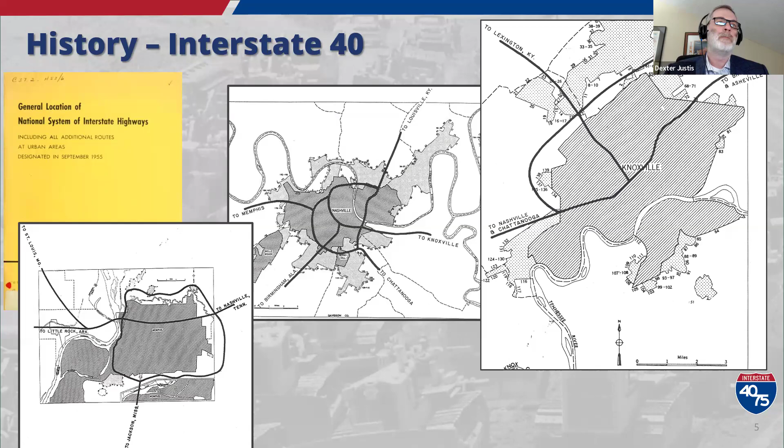These are the drawings from the Yellow Book back in the 1950s that show what ended up being I-40 coming out of Little Rock, Arkansas into Memphis, on over to Nashville, and then on over to Knoxville, going right through Knoxville. Obviously in the Yellow Book, at that time they didn't have interstate numbers, but that is the same interstate. And then you compare that Yellow Book image to what Knoxville looks like today, and you can kind of see that small bypass that goes around Knoxville called I-640 that pretty much looks very similar to what the Yellow Book said it should look like. Now it took many years to implement what that interstate structure looks like, but that was the genesis of the beginning to where we are today.

So this is a little more zoomed out view. I showed you Knoxville just a second ago, and you see that bypass, I-640. But the limits of our project are really to the far west of the screen, to the left. You can see I-40 and I-75 merge at what we call a directional interchange. And then it runs 17 miles to I-640. Are y'all seeing my pointer?

I see it. Okay, yeah, I didn't know. Yeah, so it might be just mine. I'm gonna come out and come back in. I don't know why it's not showing, but that's fine.

The I-640, I-40 intersection on the west side of Knoxville. It's 17 miles from the directional interchange in Loudon County, to the west on the left of the screen, to right here in the middle of the screen. So it's 17 miles.

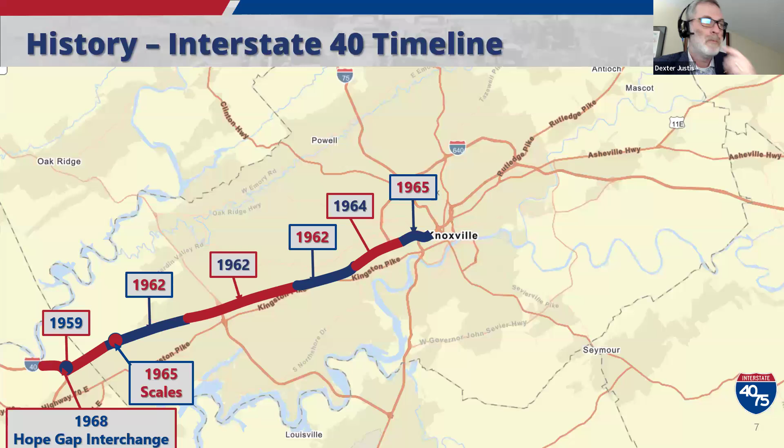As time moved on, we started doing interchanges and some improvements and widening from the middle 60s to the early 80s. We widened from what was a 2-lane on each side of the interstate to a 3-lane through the majority of this, and sometimes 4-lane in parts as well.

You also see where we updated a couple of those areas. In 1981, I-40 and I-640, that bypass I talked about, came into existence, which was the year before the Knoxville World's Fair. That was largely intended to be in place right before the World's Fair came to Knoxville in 1982.

Pellissippi Parkway, which is another interstate that runs north to south through the middle of the screen, came on board in the late 90s. So we had an interchange with another interstate come into the middle of the corridor.

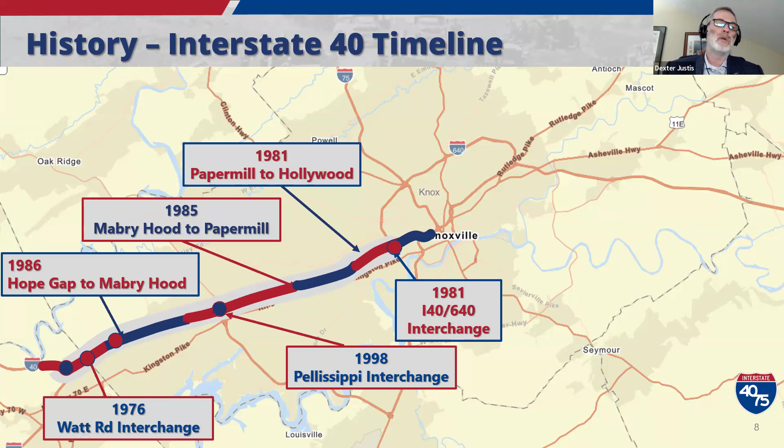As I scroll on through, we started having more interchange modernization happening in the late 90s and into the 2000s. As this corridor grew and expanded, the interchanges that were here became overutilized, and we realized we needed to do projects to make the interchanges work a little better, so we'd have lower friction values and better movement of traffic through the corridor.

You can see multiple interchanges: Gallaher View in 1996, Cedar Bluff in 1993, 2003 for Lovell Road, and Paper Mill in 2003. The latest one we did a little expansion on was Campbell Station in 2015.

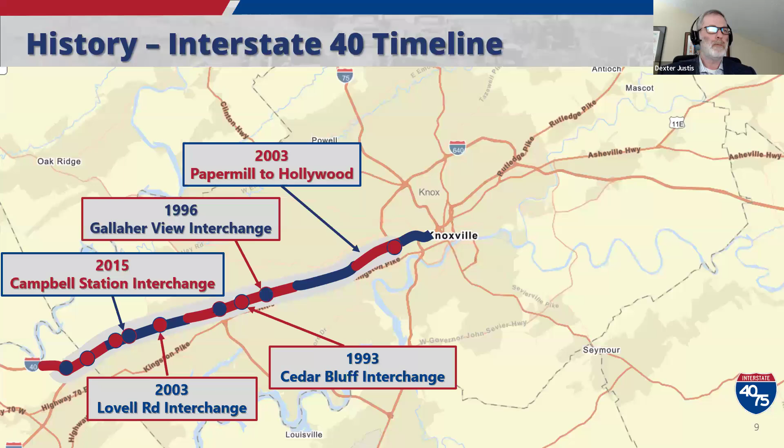But as Knoxville continues to grow, it is one of the fastest growing mid-size cities in the United States. It has ranked as one of the 20 fastest growing affordable cities in the country in the past couple of years, in 2023 and 2024. It was also listed as one of the cheapest places to live.

It receives high marks for quality of life, housing, amenities, environment, transportation, all those good things, cost of living being one of the ones we enjoy most here in East Tennessee. A lot of things going for Knoxville and the state of Tennessee in general.

There's been some mass exodus to the south in recent years, whether it be cost of living, taxation, all those kinds of things. We are seeing historic growth in Tennessee, and Knoxville is one of the biggest beneficiaries of that.

Interesting enough, we track U-Haul and Pods usage, and in 2023 Knoxville was rated as the number 17 U-Haul location and the number 7 Pods location for one-way movements. So one-way U-Haul trips to Knoxville ranked number 17, and Pods were number 7 in the country.

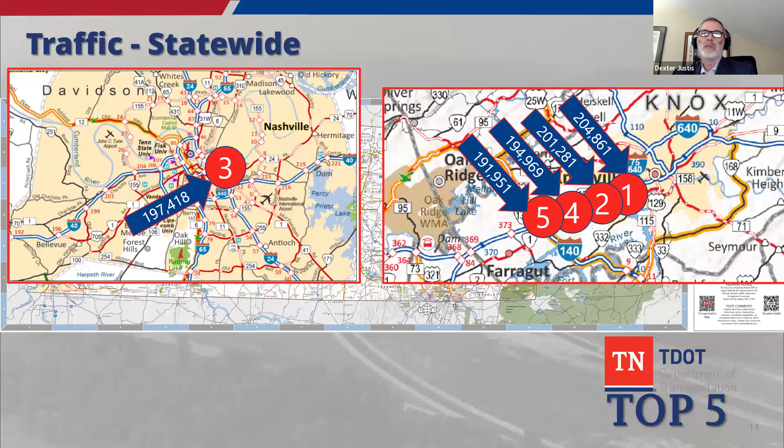Here's what the values look like. In the eastern part of the corridor, we're seeing 205,000 cars a day, more recently measured at 212,000 cars a day, and the highest one in Nashville is just under 200,000 cars a day. A lot of people are really surprised to see that's the case. Again, 4 of the top 5 in the state are happening here.

Congestion, obviously, lots of cars breeds congestion, which is indicated by the ADT, average daily traffic.

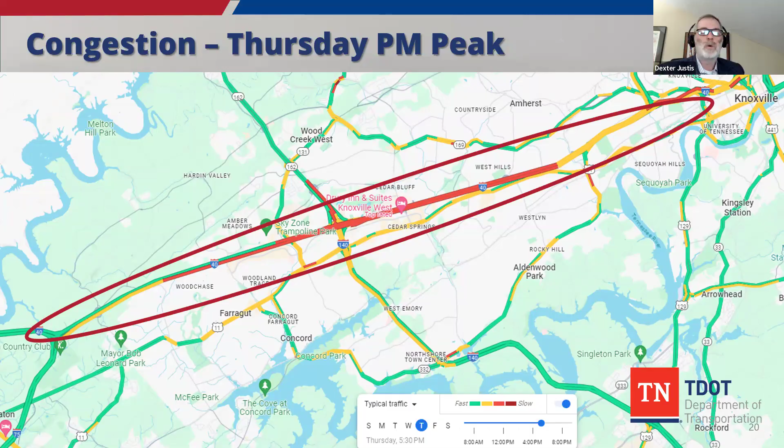Like I say, modernization from the time frame that I started the presentation with till today is pretty extreme. And we're not unique in this way, but it's definitely worth understanding history and how things got to be.

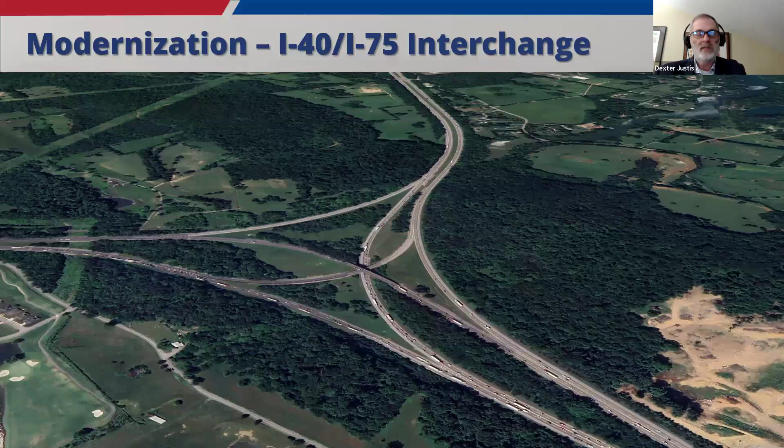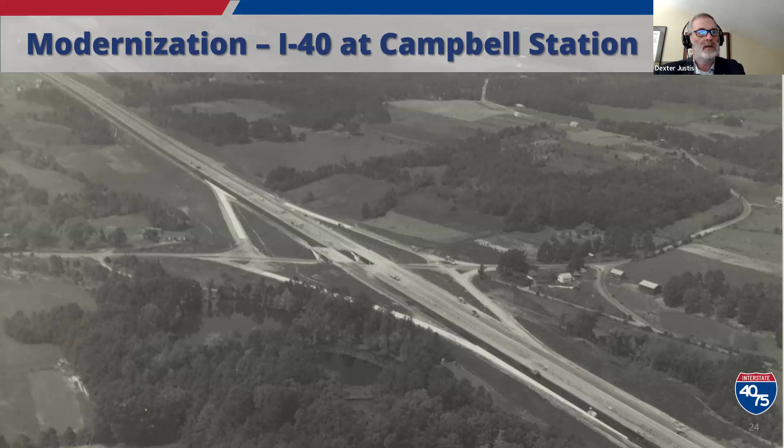So we know that the urban environment is growing in on this interchange. But today, we don't have the space confinement issues that we have through the remainder of the corridor. Just move a little bit east to Campbell Station, about 3 miles from that last interchange, and you can see what it looked like in the 1960s when they were finishing up construction and how rural this area was. Then you go to today and it's pretty well grown up right against the interstate. We have a really large retail area off of this interchange, and it experiences frequent delays, congestion and backup here.

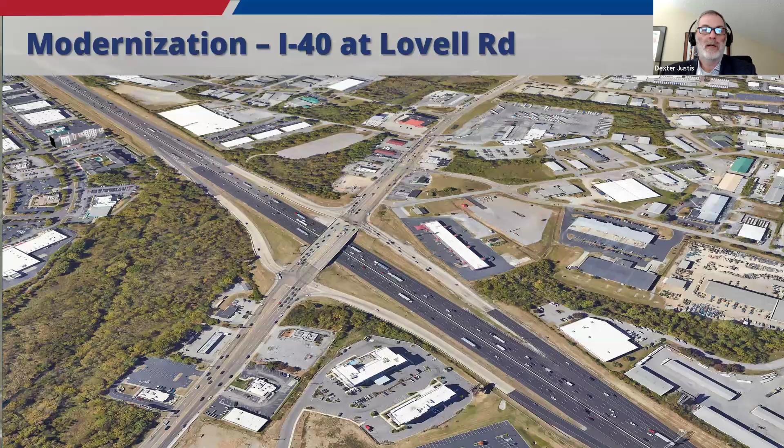Moving just a little bit further east, about a mile from that Campbell Station interchange, you get to Lovell Road, again very rural when things were built. You go to today's environment, and as far as you can see in each direction, we have commercialization and urban growth. Everything you see here in green is really just environmental features, wetlands, drainage features. They're still green. Everything else is paved over and has commerce going on every day.

Move a little bit further east into Cedar Bluff. We have another reiteration of a very rural, very mundane interchange, and again you see much of the same thing. Knoxville just overtook this corridor. It's where all the growth happened from the 60s to today. Everything moved out of Knoxville to the west along this corridor.

Then you get to Walker Springs, and to the right of the page, we don't even have any roads going in that direction from this interchange. It just goes over to a parallel route, which we now call Kingston Pike, which was a very rural 2-lane road when the interstate was built. Today, roads go in every direction from this interchange, and that Kingston Pike that was a 2-lane rural road is now one of the heaviest commerce roads in East Tennessee.

And then finally, Paper Mill. This is the location of 212,000 cars a day, very, very much still rural when it was built. Today, not so much.

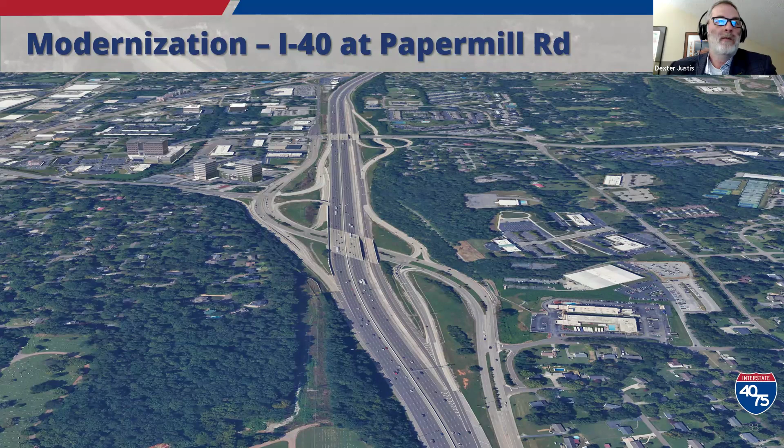We show this a lot just to prove the point that in the 50s, when the interstate was dreamed up, it seemed like a good idea to put 2 interstates together - one that goes completely from one side of the country to the other, and one that goes from the southern border all the way up to Canada. Seemed like a good idea because it was in the middle of nowhere. Traffic was a non-issue, and nobody lived there, right? But you can clearly see with the amount of traffic coming through here that the city of Knoxville overtook this very rural area and made it the financial hub of the city, where all the growth happened.

So as I talked about, we went through several different iterations of projects after we went from the ultimate opening of 2 lanes in each direction. We went through several iterations of widening starting from downtown Knoxville in the east of the corridor, moving west all the way out. In some places we have widened to 4 lanes on each side of the interstate.

Some places it's still 3 lanes on each side of the interstate, and in others it's 5 lanes on each side. As you know, as you do lane drops, that's one of the characteristic places to have a bottleneck, hence the sense of necking down, right?

Those cause congestion issues, delay, people slowing down, people having to merge with each other when the lane saturation gets to the point where people don't have good, clean, easy merge points. You start having people slowing down to make merges, and that compounds itself into a congestion issue.

The state measures bottlenecks and delay across the state, and you will see that this corridor ranks number 8 in the state of Tennessee for congestion. So what I would add is, you start thinking highest traffic counts, but not necessarily the highest congestion rates. You see more of those in Nashville than you see here, like I was saying earlier.

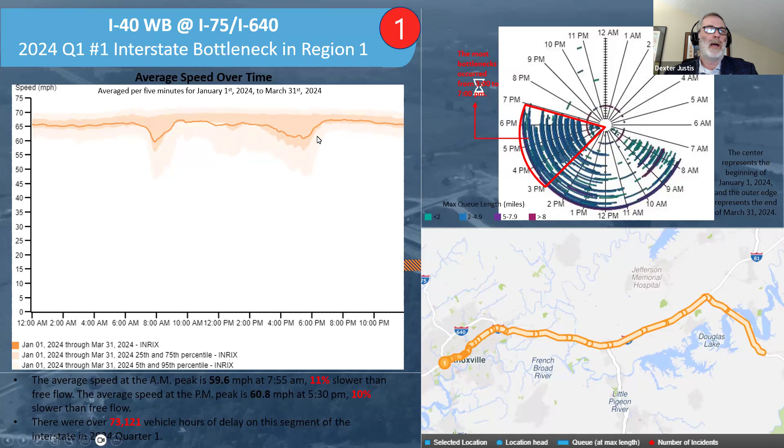A little more about the bottlenecks and congestion we see. These are the time frames through the day. We measure the average daily traffic, and you can see the dips in the morning for the AM peak, and then the prolonged dips through the afternoon and all the way out through 6:30, 8 o'clock at night before traffic returns to normal speeds.

A heat map also shows the same thing with the speed differentials that go on during those time frames.

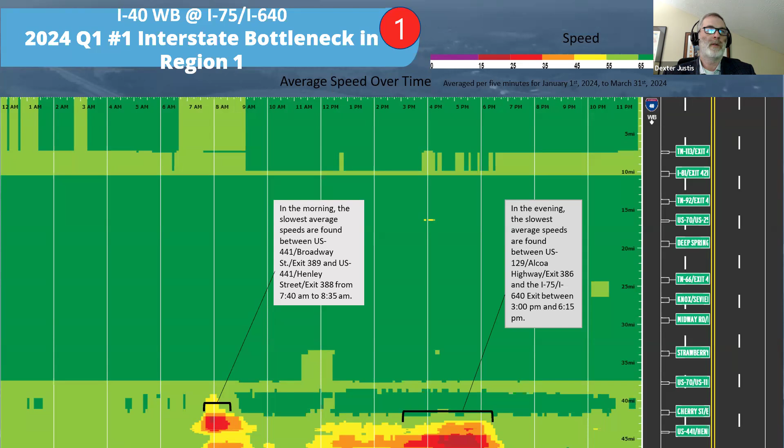The challenges for the corridor include high traffic volumes and bottlenecks. One key thing I didn't mention earlier is we have weigh stations here, two of them, eastbound and westbound. When we installed those weigh stations in the 60s, it was an ideal place to do it. You're catching two interstates with one set of weigh stations in the middle of nowhere, and they have served us well for 50 years, but now they are a contributor to the issues we have here.

We have a huge percentage of trucks on most interstates throughout the country, ranging from 4 to 8% truck traffic. On this corridor, being the crossroads of America with an interstate running east to west and one running north to south, and knowing Memphis is the regional and national hub for FedEx, and unloading of barges out on the Mississippi River with stuff coming from there through this area.

Our truck percentage on this section of interstate is nearly 28%, which is 3 to 5 times the amount of most interstates around the country. So this weigh station ranks as a top 3 weigh station in the country for volume, and at times in certain years is ranked up almost as high as the highest volume weigh station in the country.

Our project approach is to look at this corridor from front to back and see how to best do this. We have split this project into multiple ideas, bookended by two ideas. To one extreme, we made a mistake at some time in the past when we decided to put these two interstates together for 17 miles. What could we do to split them apart? So we're looking at a potential relocated I-75 to make two interstates instead of one.

As you can imagine, building a brand new interstate is relatively cost prohibitive, but it is one scenario, and we are studying what happens to traffic if we do that, and how local usage would use that. The other extreme would be adding express lanes through the corridor, so paid option lanes, if you will. So those are the two extremes: relocated I-75, or express lanes through the corridor.

But then we're also studying what if we just make more improvements through the corridor, whether additional general purpose lanes to remove bottlenecks, additional interchange modifications that will further smooth traffic flow through here, and maybe even separated exit lanes or CD, collector distributor roads, if you will. I'll get into most of those options a little deeper in just a few minutes.

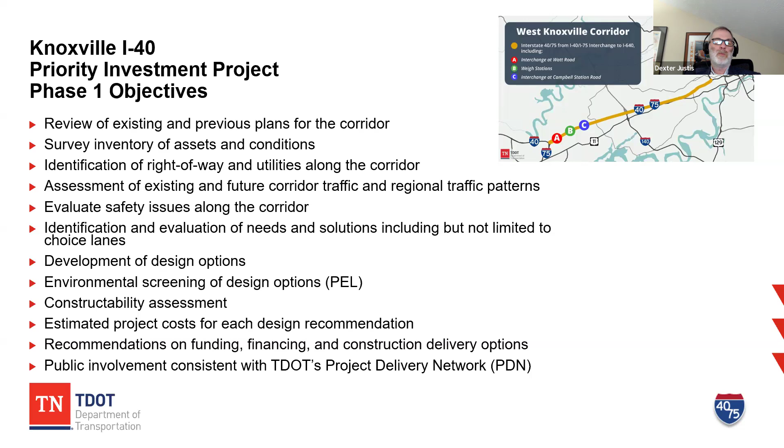Public involvement is always a big part of what we're trying to do. We want to take public input on this corridor and understand how things are going. It's one thing to analyze traffic, but it's another thing to understand how these folks perceive it and how they feel about what it'll do to their communities if we make changes of any kind. So public involvement and public meetings will be a crucial part of our process.

That didn't make it very far at that time, based on funding. Being a pay-as-you-go state, we realized we couldn't afford to build it, and toll facilities at that time were not something the state of Tennessee would do. So it just became financially something we weren't willing to bite off at that time.

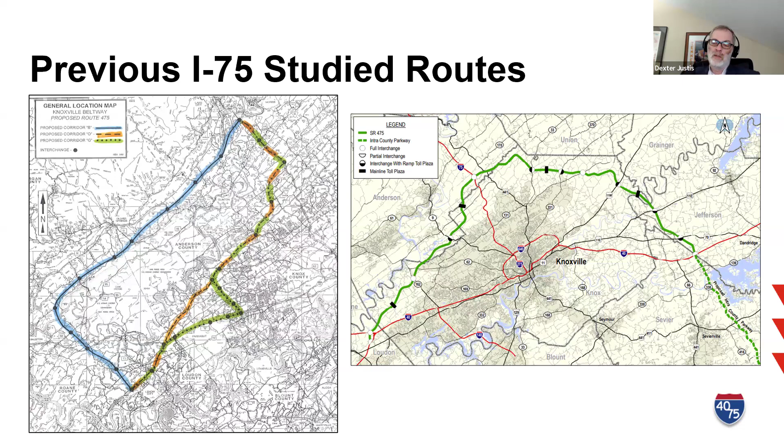The environmental stuff we are considering here—we have already fully built out a GIS mapping system for central data collection that includes multiple data sources: socioeconomic, natural environment, public lands, transportation infrastructure, the utilities I talked about earlier, and Knoxville's GIS data. So we've pulled a lot of data into this mapping system, so we know where the cemeteries are, where the churches are, all the cultural locations we just can't hit, all the environmental things that would be showstoppers, whether it be a blue line stream or a cavern or something we just can't mess with. We have all that mapped out as part of the survey work, but we have it in a GIS mapping system to better understand and turn different layers on and off where we're doing alternative analysis.

We're working on desktop surveys of those environmental features, even beyond that, pulling in data from TVA, TDEC, the Department of Environment and Conservation, and the Army Corps of Engineers. They have data as well that we're pulling into this system. Obviously, the initial part of that is just looking for those fatal flaws or showstoppers—if we can identify something absolutely unhittable, we know any alternative that hits that area isn't worth chasing.

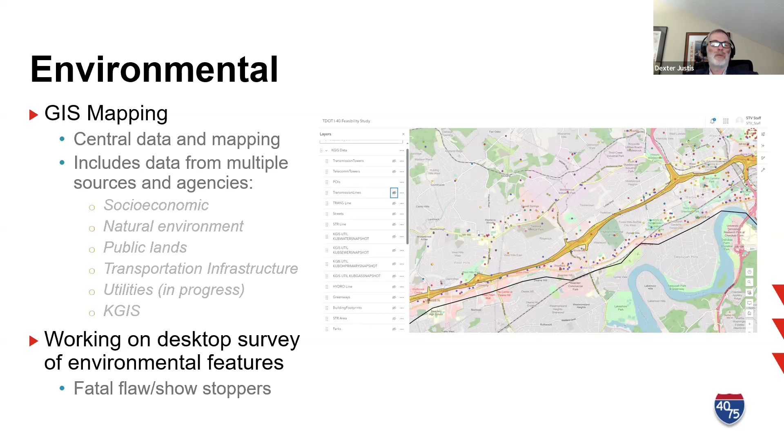Traffic data collection, which is the backbone of any civil engineering project on a roadway system, starts with the safety data. The RDS system, which is a radar detection system for vehicles, freight data—like I mentioned, we're in the top, or in the 28% truck range here, and the scales have the top 3 scale volume in the country.

We've used streetlight data—it's a data source for origin destination to understand how traffic moves through here. We're all running around with cell phones, and most of our movements are being tracked at any given time, and this software knows how people move. They don't know your individual ID, but they know phones move. They know that from the start of a trip until the car's fully stopped and turned off, it logs those movements. So we know what the origin destination study shows—we know where people start their days and how they move through this corridor.

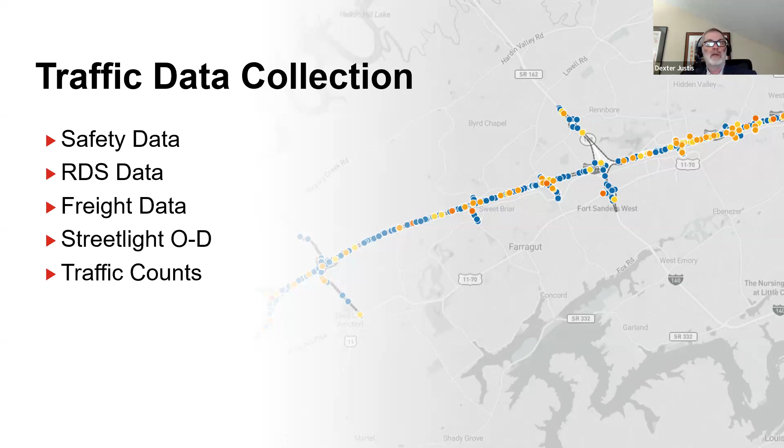Traffic counts are a big part of it. We've done an enormous amount of traffic data collection. You can see here through the corridor and everything around it, we had 181 total locations where we put in traffic counts. We did an 8-day count starting on a Saturday and ending the following Saturday, so we captured 2 Saturdays. What's important about that in November is we were able to capture a normal Saturday with no Tennessee football game, and a Saturday with a Tennessee football game.

University of Tennessee being in Knoxville, at least 6 or 7 days a year we have a football game in Knoxville, and that brings in an additional 100,000 to 150,000 people into the city that day. So we felt it important to capture what those traffic days look like. We did 48-hour bidirectional counts at ramps at each of these interchanges, and turning movement counts as well. The data collection has happened, but we're still completing the report to back check and make sure all the math adds up at all the different locations, and that the transfers from one location to the next add up so we have congruent data.

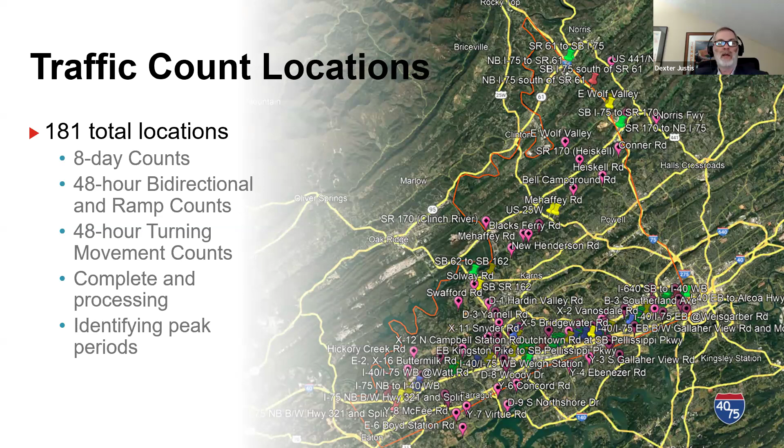All that is important to figure out peak periods and how heavy traffic is at all these locations. So when you know what the counts are at certain locations, and the percentage of vehicle movements based on origin destination, you can start mapping out—say, if you put in a relocated I-75, and people in the middle of the map are moving south and getting on this corridor just to end up at another location a little north of the interstate, we'd know based on those origin destination studies that a certain percentage of people would probably use this new relocated I-75 and come off of the corridor. So a lot of statistics and probability goes into this traffic analysis, understanding how people move and migrate through this corridor.

Again, we talked about the bottleneck concerns earlier and the rankings and all that kind of stuff, how it plays here, and how it's further exacerbated by incidents in the corridor. Incidents contribute to 41% of the congestion here, and on an annual basis, we're seeing over 600,000 hours of delay. So 600,000 recorded hours of people sitting in traffic doing nothing or wasting their time.

Safety through the corridor, the crash hotspots through the corridor. You can see we have 3 large ones. 9 of the top 20 within our region are located in this 17-mile corridor, and the top 6 of the top 20 are within the corridor as well. Statewide, that furthest one to the west ranks 5th in the state for safety concerns and crashes.

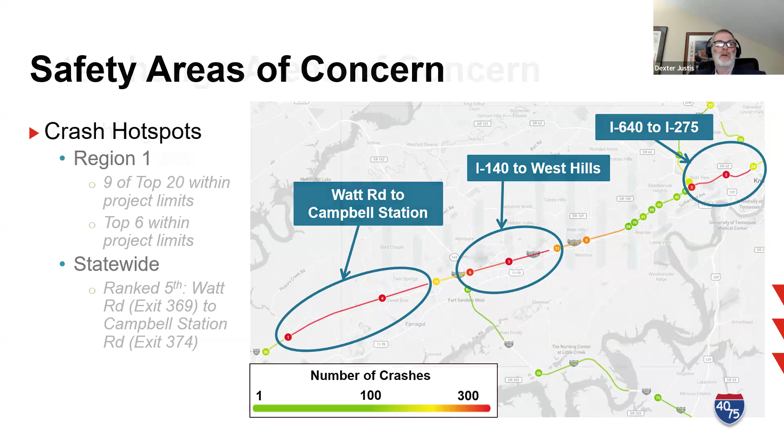We also see the crash data at each of the interchanges through this 17-mile corridor. And you see the busier the interchange, the more crashes that we see, the highest one being Paper Mill there, and that's where we see the most traffic. 212,000 cars a day at that interchange, and we see more crashes there because of more traffic, more turning movements, more people coming in and out of the interchange equals more safety concerns. Again, so many local trips, people merging into the corridor and right back out of the corridor just to go 2 exits or something like that, contributes to the amount of crashes here with the bottleneck issues that we have.

A lot of traffic data here on the types of wrecks that we're seeing, rear ends being 10% higher than the interstate average in the state, and 20% higher than statewide average on our highways. So we know that the rear ends are up, but rear ends happen because of speed differentials, people changing speeds, cranking up to say 70 miles an hour and then right back to 50 and up to 70 and back to 50 or back to 45, 30, whatever it might be. As people are hitting those brakes, you end up with a lot more rear end wrecks in these congested scenarios.

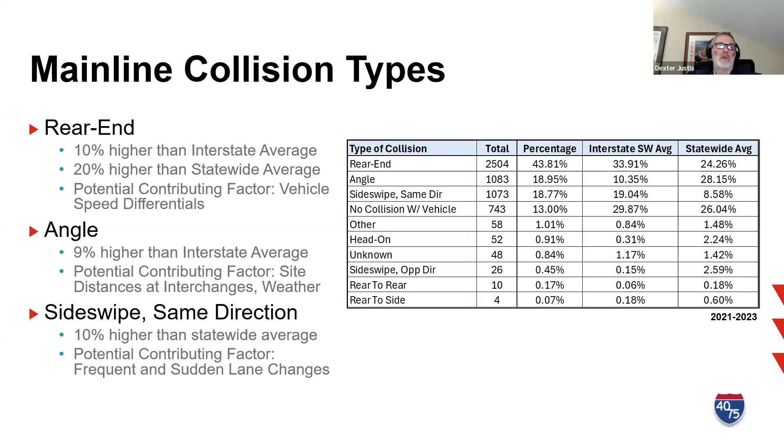Angle crashes are higher as well. That can be attributed to the same as the sideswipes there, with so many people coming in and out of the corridor. That's a lot of people merging in and out of traffic. And with the bottlenecks, you have a lot of merges as well. So when you have speed differentials and a lot of merging going on with small space because of the amount of traffic that's out there, you end up with a lot more sideswipe and angle crashes.

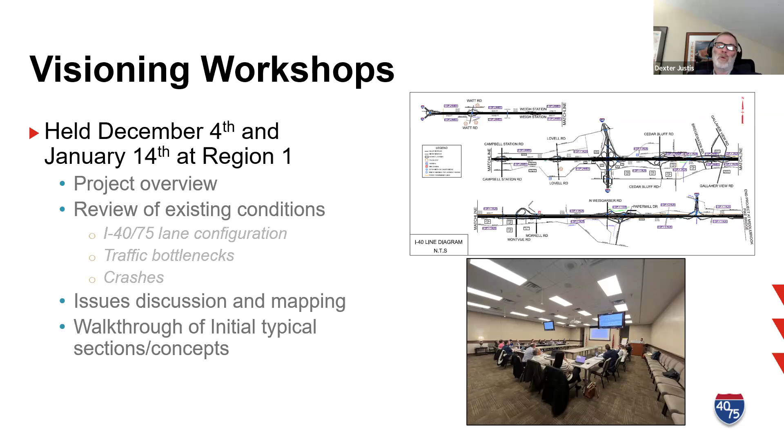To date, we have had visioning workshops where we have brought engineers to the table and planning folks to the table to say, hey, what kind of crazy ideas can we have here that we could further evaluate? We want to leave no stone unturned, and we want to consider all potential things that could improve this corridor. We had one on December 4th and one on January 14th of this past winter. So we have a lot of good ideas, a lot of different things that we're looking at. Again, we brought those engineers up to speed on reviewing of existing conditions, and then we discussed issues that we saw through the corridor with mapping tools and those kinds of things.

Design concepts, again, that come out of a lot of those workshops. The initial concepts focused on the I-40, I-75 main line. We looked at where could we add general purpose lanes. A general purpose lane is in Tennessee - I know throughout the country, a lot of states have express lanes. I know they're popular in Florida, Texas, North Carolina, here in the South, Atlanta. You have paid use lanes, express lanes, if you will. A general purpose lane is a lane that is there that you get to use for free. So do we want to add additional general purpose lanes through this corridor, and what would they look like? Where would we be removing bottlenecks, if you will?

The other thing we've looked at heavily through here is CD roads, collector distributor roads. Those are very popular in places where you have a lot of people entering and exiting and using local trips through an interstate system. I've seen these used heavily in California and LA. You see them around the country in other varieties of ways. But we have also pushed through alignments that show where could we use CDs, collector distributor roads, and separate those local trips from the people who are just traveling through this corridor. Choice lanes is Tennessee's term for an express lane, a paid lane.

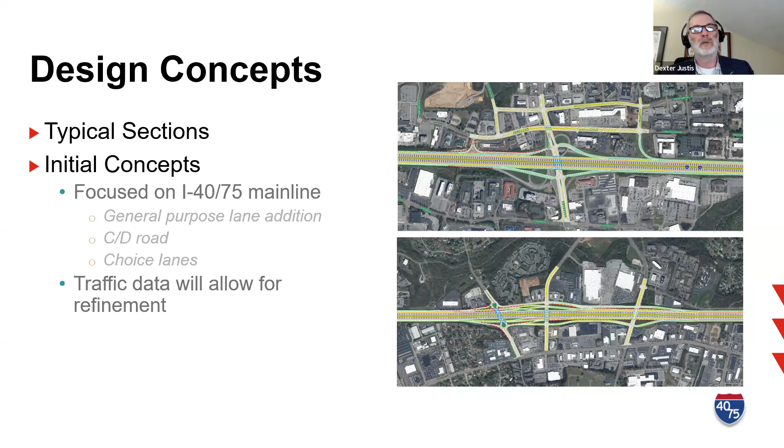So we have done a lot of stuff looking at all those different things. We've looked at more interchange modifications. How can we better use these interchanges to have less frequent interactions with weaving and lane merges? Traffic data will allow for refinement as the traffic data gets fully realized. We start placing this into traffic modeling with alternatives. It will definitely point us in the direction we need to go.

A few cross sections, or typical sections, that we are looking at. This is what we would say on the main line I-40, I-75, I-40 corridor would be the maximum width that would be required. If we implemented CD lanes throughout the entire project, that's what you see on the outside - you'd have 2 to 3 lanes of CD lanes out there. The existing general purpose lanes are either 3 or 4 lanes wide. That's the 36 to 48 that would be in the middle.

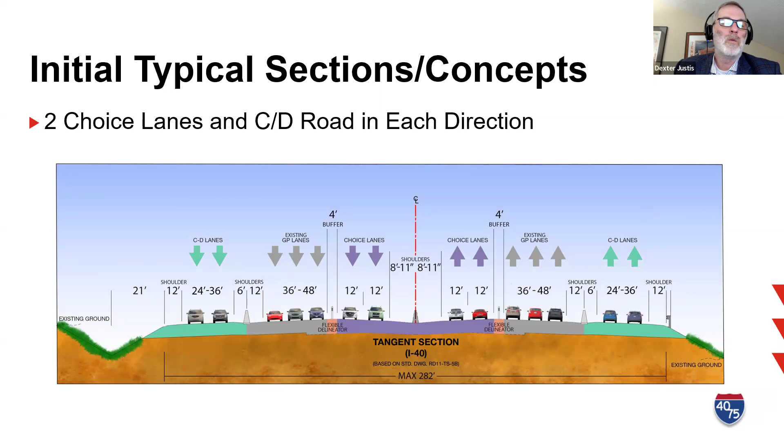And then you'd have choice lanes - in the middle of the cross section, you see the choice lanes, which would be 2 lanes in each direction. So if we were to implement this full system of CD roads, choice lanes, and general purpose lanes, we would see our maximum width through this corridor being 282 feet of pavement width. That gets you from a potential shoulder to shoulder on the outside. That does not include what the drainage does on the outside - how it tapers out to a river, a creek, or a neighborhood. So you have side slopes and potential retaining walls that would go outside that 282 feet. But we know this is the maximum width roadway that we would probably be looking at through this corridor.

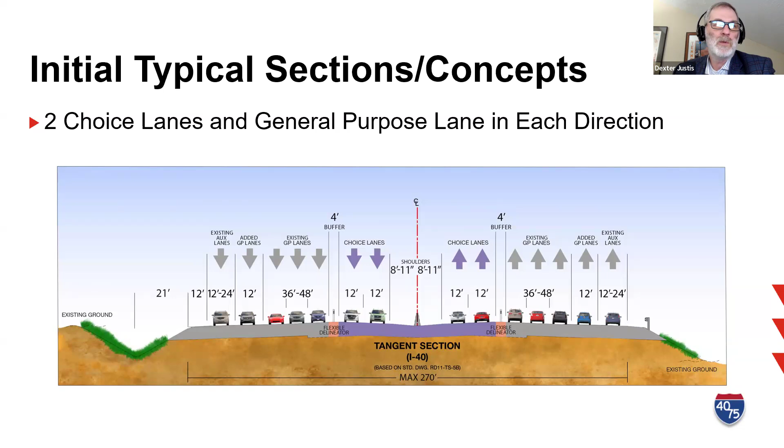We step down from there and say, okay, maybe we can eliminate some of that width by going to what we term auxiliary lanes, or lanes that just go from one interchange to the next, but travel right beside the general purpose lanes. We still have a choice lane in here. We have shrunk the potential corridor down to 270 feet wide instead of the 282 we were talking about - so we save 12 feet by doing that.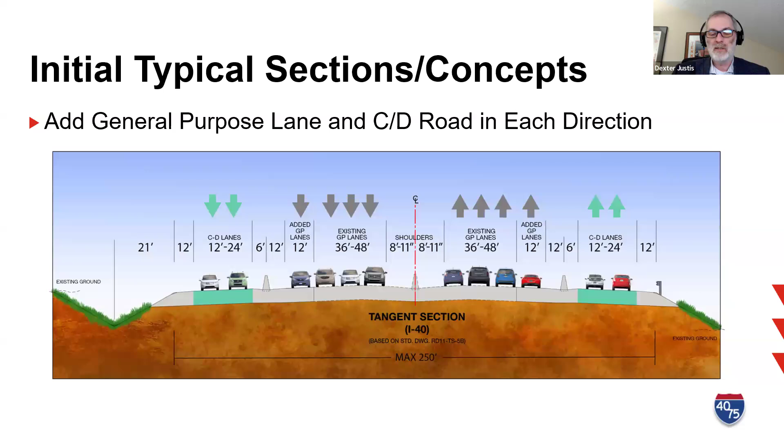And then we further look at what if we just add the 2 choice lanes in each direction - we end up with 246 feet. So again, we narrow the potential cross section further. What if we add general purpose lanes and CD roads, but no choice lanes? That's the typical section we would be looking at there.

What if we go collector distributor road in each direction and no choice lanes? That's what we'd be looking at - another 250 foot cross section. And then what if we just add general purpose lanes to eliminate bottlenecks? We could stay as small as 214 feet. But again, in this scenario, we have limited capacity, but we have removed bottlenecks, which will obviously improve traffic flow and result in less people pumping brakes as they're trying to merge in from a bottleneck.

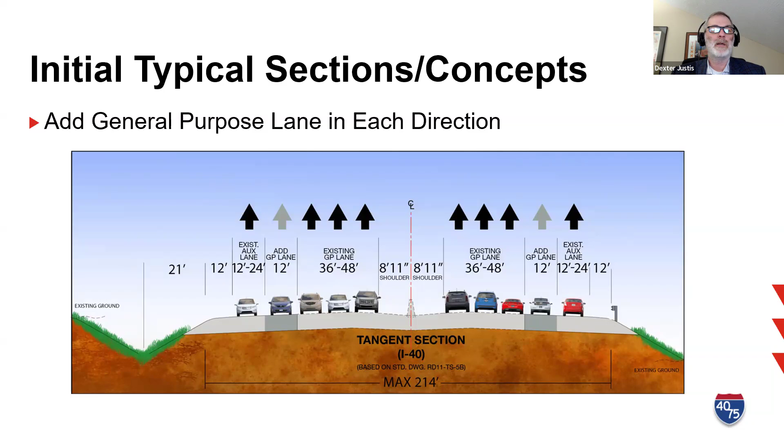So schedule - we're looking at, like I say, those are the plethora of options that we're looking at, bookended, if you will, with the relocated I-75 and choice lanes on the other end, and every other option in between.

The schedule for this project, as we're marching through, looks a little bit like this. This is about a month-old schedule at this point, but we kicked off this work back with traffic data collection in the first week of November in 2024. Data collection continued, visioning workshops in December and January, working on public involvement plans and project management plans in January and into February. The data collection report has come out since then that actually shows how traffic is being used, in the February timeframe.

10-year plan input - Tennessee, being a pay-as-you-go state, publishes every year what we expect to spend our money on for the next 10 years. So a lot of this information is going to be feeding into the 10-year plan.

So we did supply data input into the 10-year plan this year, which just got released based off the governor's budget this past week. But we don't anticipate seeing projects from this study show up until next year, because we obviously don't know what the solution is at this point.

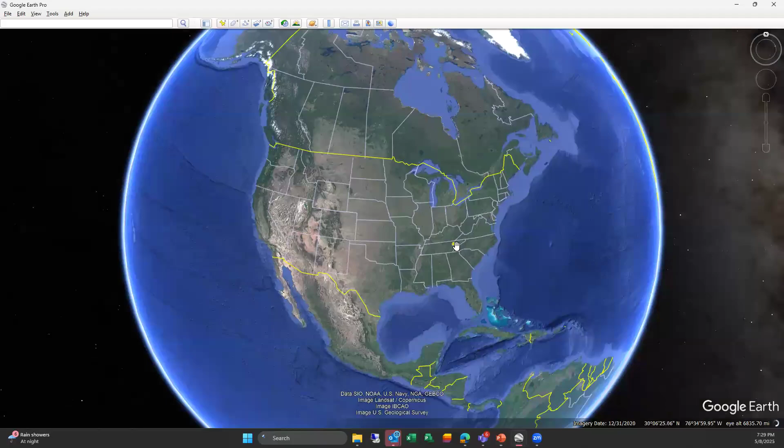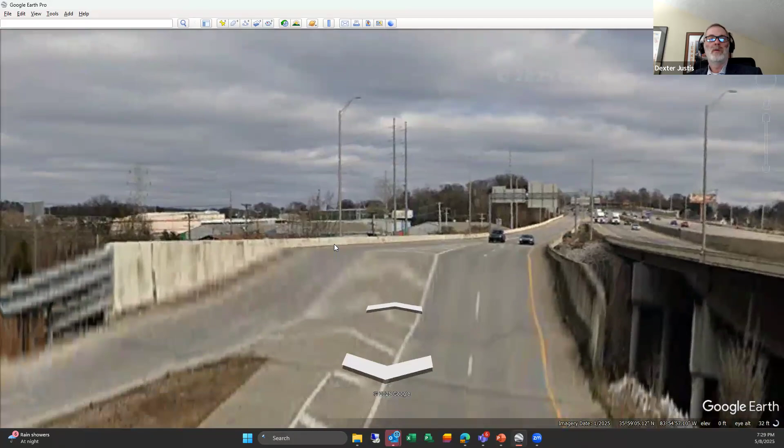Well, it's just not concrete - they put architectural features in, really cool from my viewpoint. And in the public space, that's not always something we can do. We have limited funds, and I think right there is what you're talking about. This is in the winter when the trees aren't looking the best, and some of the landscape isn't looking the best, but that's one location where we were able to do that.

It takes environmental consideration - the environment's not just the trees and the bunnies and the crickets and the fish, but also the human environment in which we live, and understanding all those things to apply an ideal location for aesthetics to be part of the equation.

With public funds being limited as they are, we talk about projects being $1 billion. To Joe Q. Public, $1 billion sounds like a lot of money, but when you look at the transportation needs across the state of Tennessee and across the country, that 'B' is not that big of a word. Billion is not that big of a word in the big scheme of things. So being a good steward of those monies and providing the best transportation improvements we can with that money is being a good steward.

Unfortunately, the aesthetic piece gets pushed to the background sometimes because of the funding scenario. But when the context and everything comes to the forefront, and the right opportunity at the right time, we do get an opportunity such as this one occasionally.

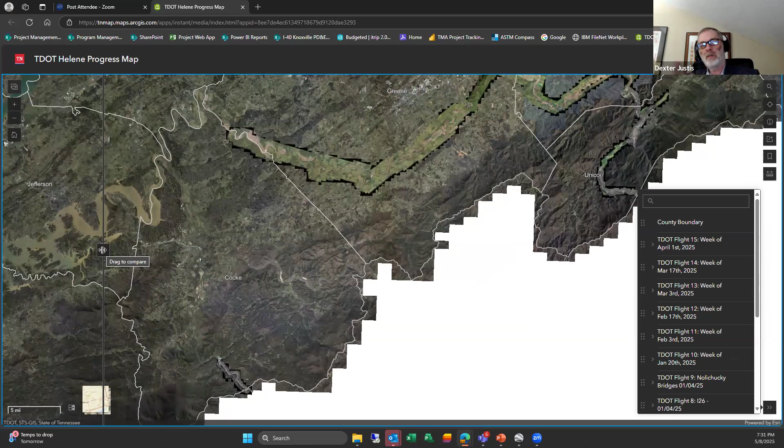Y'all want to see me work just a little bit? Let's see, I think this is super cool and interesting that you brought it up. Take me just a second to get there. Of course, I'm a traffic nerd and an engineering nerd, but for those not familiar with Hurricane Helene and what it did to East Tennessee - it dumped 32 inches of rain in North Carolina, a border state of ours, and the rivers got up and tore up a lot of stuff.

And right here on I-40, I only have images of the Tennessee piece.

But the river that runs right along the interstate really created havoc and tore up the interstate in the state of Tennessee, but even more so in North Carolina. To the point, you can see we have traffic in one lane each direction, because what is traditionally the eastbound side got washed out. You can see we have equipment down on the slope along the river trying to rebuild it as we speak.

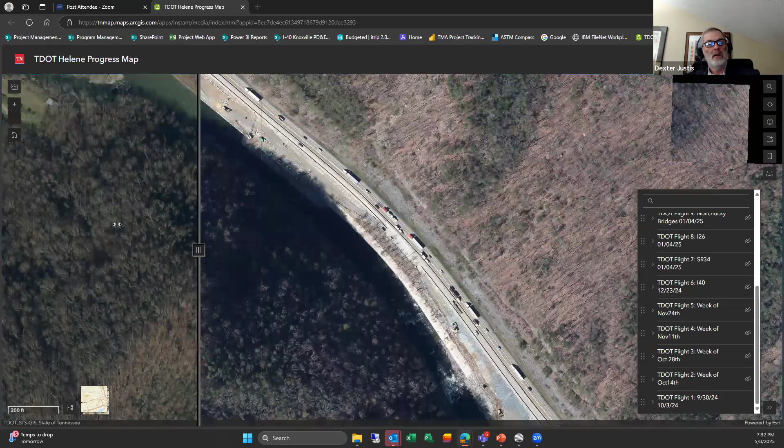Trying to give you a before and after. So this is before the storm, interstate coming through here. And the after is that the eastbound lanes are gone through this section. The river got up and washed it out.

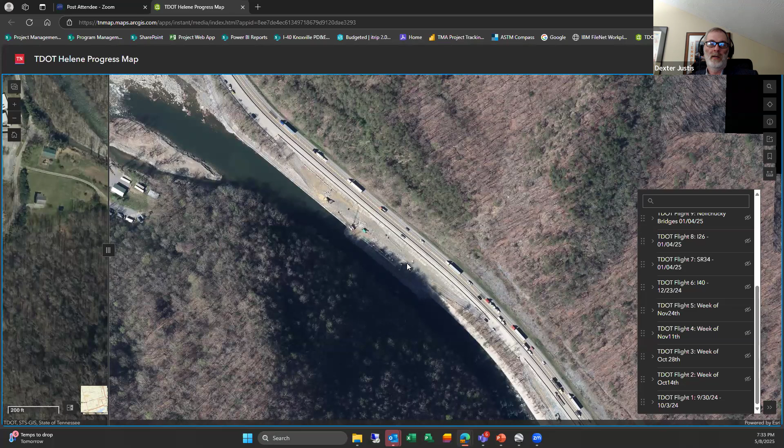But to the point, the Tennessee side is much further along than the North Carolina side. North Carolina is in much worse shape than we are. We think in Tennessee that we'll have it back to two lanes each direction by the end of the year, into 2026. But we are hearing from North Carolina that it could take an additional year to a year and a half beyond the Tennessee timeframe to get North Carolina taken care of.

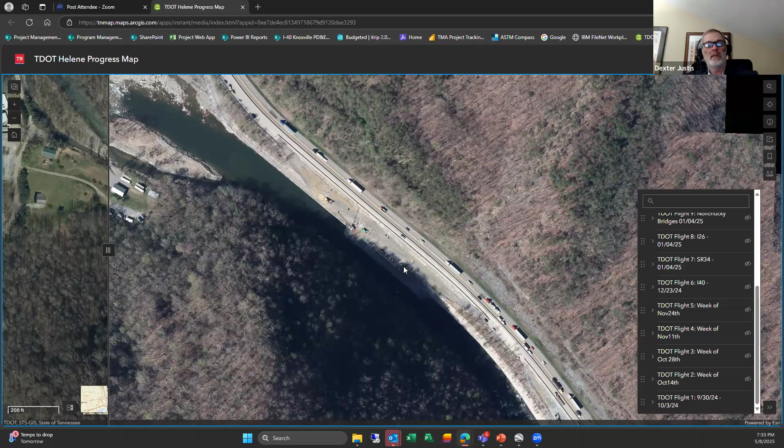And to show the amount of water that came through those rivers, the river normally is like 100 feet below the freeway. And it got way down there, it got way up. It was an extreme event for sure.

We've had emergencies in the state of Tennessee. We've had this section of roadway wash out a bit in our history, but it got crazy. They had a dam in North Carolina on this river that was on the verge of failing. We were extremely blessed that did not happen. The amount of not just damage, but lives lost that would have happened through here had that dam actually collapsed would have been extreme. But it's my understanding that it was really close to happening.

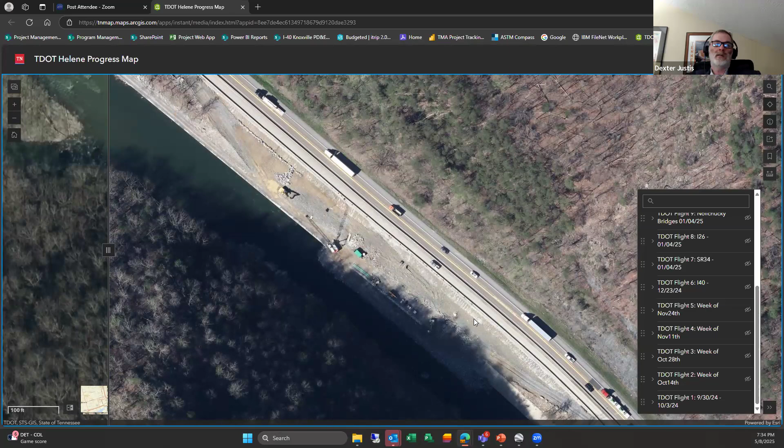So that dam is currently damaged. It has a lot of free flow for the river going through there right now. So in our repair efforts, every time we get a little 2-inch rain or 1.5-inch rain over in North Carolina, this river has become really flashy and it tears up a lot of the work we've already done. Whereas traditionally that dam is there and it slows the water down and we don't have those issues. So a lot of challenges.

The state of Tennessee has a lot of damages. We had quite a bit of loss of life during this event, but North Carolina, our friends to the east, our neighbors, and in a lot of cases family, have it probably 10 times worse than the state of Tennessee does. It was extreme.

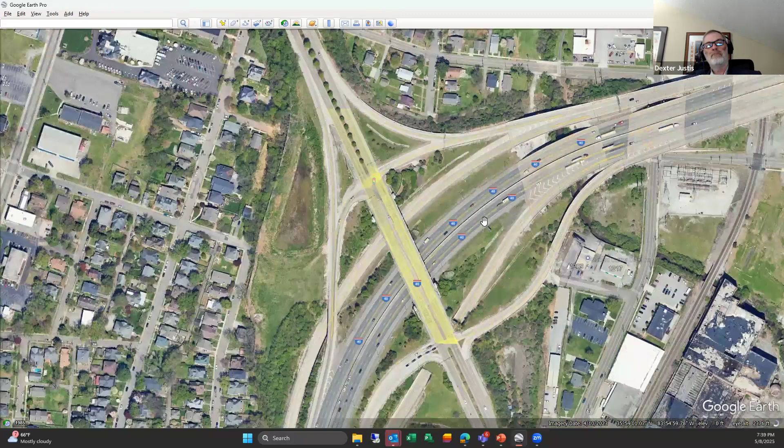Yes. A fun one to talk about is the diverging diamond. I don't know where all of you folks live or if you've been lucky enough to run into a diverging diamond interchange, but I have one here as an example real quick. This is the 407 interchange in Sevier County. These have started popping up all over the country, but in 2005, they didn't exist anywhere.

I think Missouri was the first one to try it. If you're unfamiliar with a diverging diamond, if you're getting off the interstate, instead of coming up to a red light and everybody having to wait their turn to turn left to go across, then go through another intersection once you get across the interstate—which is a typical diamond interchange—a diverging diamond, DDI we call it, is a new type of interchange that appeared in 2009.

Missouri again was the first one to try it. If you're coming up this exit ramp and you want to go north, you immediately merge into a road that feels like driving on the wrong side of the road. Then you get to this side and cross over at one intersection. So instead of coming through and trying to go north and having to go through two intersections, you only have to go through one.

And conversely, if you're coming up State Route 66 and want to go west on I-40, you go through one intersection and cross over to the other side, and you have free flow onto the interstate. So between the two intersections, we've swapped sides of the road. What that does is change the amount of conflict points and the amount of delay introduced through one of these interchanges.

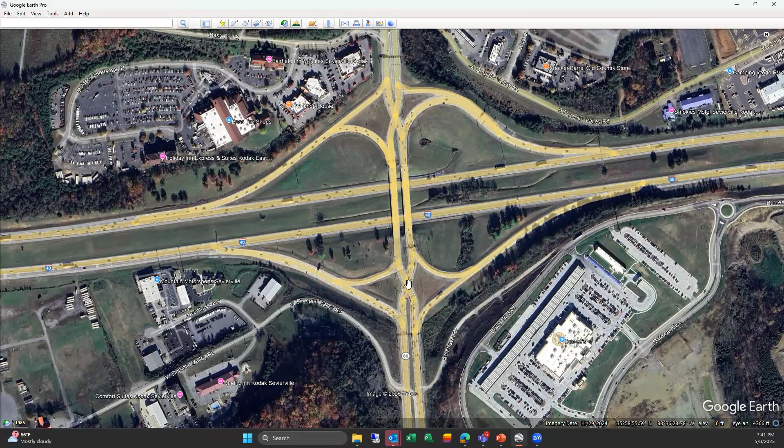That's kind of like an engineer's wet dream in some ways, right? You just look at that and think it's cool. You only normally get to see that kind of thing in city building video games—kind of fun to see one in real life, you know? Yep. And for those interested, in the lower right-hand corner, I think that's Buc-ee's, isn't it? Yep, that's the one with 250 gas pumps, something like that. Crazy.

Diverging Diamond, is that the name of that type? Yep, diverging diamond interchange, DDI. I will have to share that with my father because I didn't know that's what it was called. We drove through that one in Grovetown, and it works very well, but it was very unnerving as we were learning about it. Follow the lines and you'll be okay. Yeah, exactly, you have to trust the designers. Any other discussion or questions?

Well, this has been a very engaged group. We're so grateful that you came and spoke with us, Dexter. No problem, great talk.